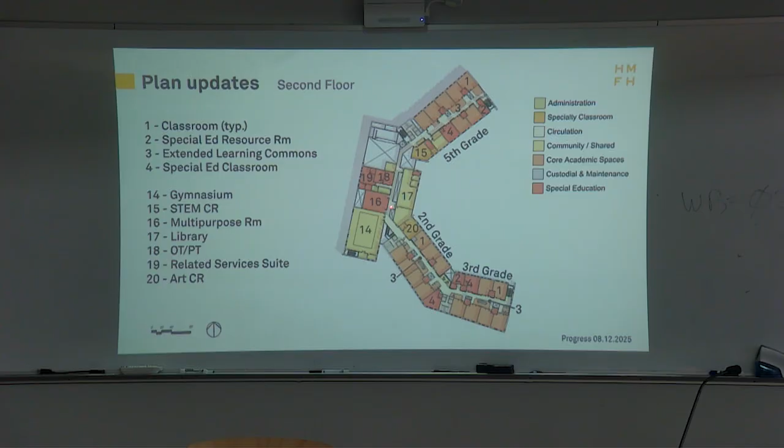The same is true on the second floor. We've got the multi-purpose room now right next to the gym, so there's some good overlap there, maybe a possible opening of the wall if that was a benefit to the two programs. Again, the extended learning commons are getting laid out in more detail. There's some additional program here, and the opening into the lower cap and upper cap are being laid out.

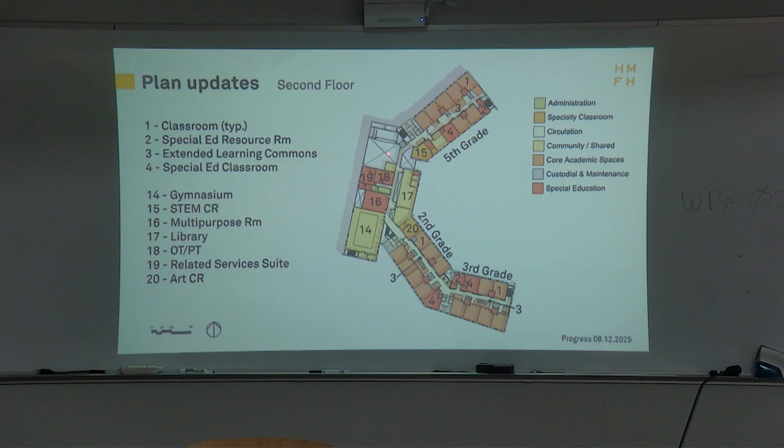And then on the top floor, I think this is very similar, just again more refinement in the learning commons, and more or less the same layout.

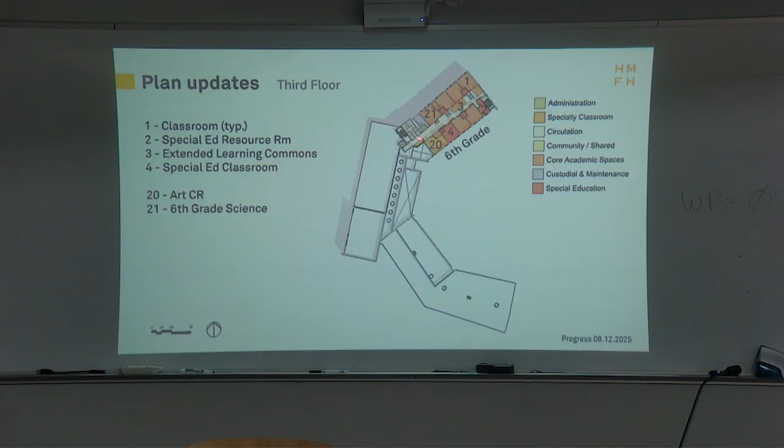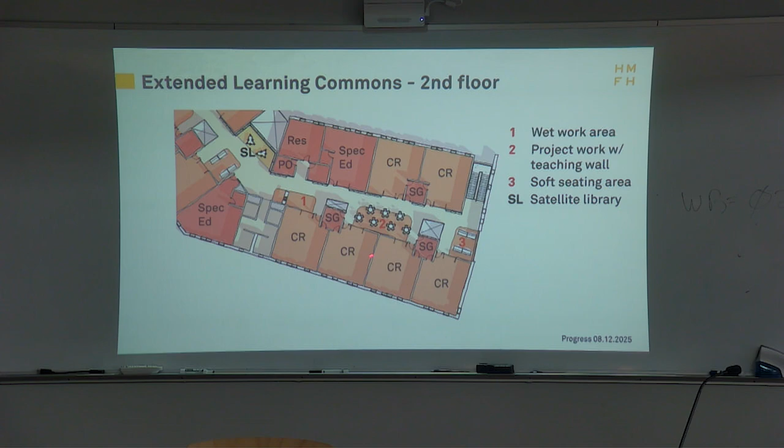Obviously this wall will get thicker and it'll work, we're pretty early. That will allow them to open this up and really make this classroom space part of their space, and allow supervision of this zone more easily.

Are we worried about sound for that, like zone 2 there? Because if there's a pocket door with glass, kids are gonna go like this. What are they doing? All right, what are they doing out there?

Well, I think the idea is if you're using this, potentially it would be open. So like all one thing? Maybe. And then what about the kids across the hall? Even if it's not, I do believe we can get something that's acoustically rated, equivalent to the wall next to it for sound dampening, or something better, and could provide the acoustics that we would need.

Obviously there's requirements for the corridor versus the classroom, so any glazing unit or door we would have has to meet that. So we would have to design to that.

I'm assuming a large amount of glass is for aesthetic purposes, but two questions. One, I'm assuming that's gonna be a lot more maintenance for cleaning, so is there an additional cost for long-term O&M? And two, there was a concern raised earlier about the staircases having so much glass, there was a concern about safety, especially active shooter situations. So are we moving glass from one area to another, and wouldn't that concern carry over?

We would be treating those with shades or some way of closing them. They'd have a lockdown system so they could be secured in an emergency, and there'd also be some sort of shade or blinds that would come down and conceal it. So for the purposes of an active shooter situation, it would be solid visually. We could have an opaque shade or something like that come down.

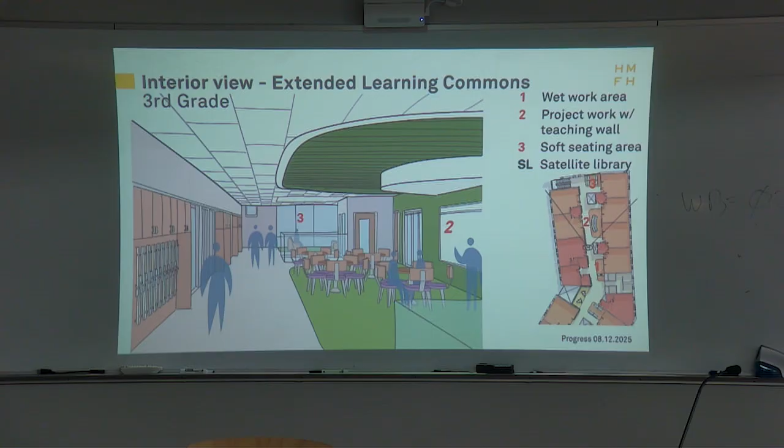So this is that view of that space, and then there are some other additional interior views that we drew, I don't know, for lack of a better word. So this is sort of that satellite library zone between the 2 grades on the 2nd floor in the lower school. So you can see, again, the idea that there could be a color here that ties, to let you know that that zone's like a pull-off zone, and there could be bookshelves, some are higher on the wall, some could be lower, and then the view down below to the satellite library below could be through this glass wall.

And this is sort of looking back to the main spine where the gym and all of those other shared spaces are on this floor. And, you know, the soft seating here in front of you, the gathering zone, and then way beyond the wet zone, which you cannot see in this.

Can you explain just how that glass box is supposed to work again? Which glass box? The one that 3 is on, I know that's not what 3 is. At the moment, this was the idea of like a glass railing. It's a light well, so because it's a 2-story connection, it does not need to be full height. It can be, and we could do it, but it's really the idea that you'd be able to have a visual connection between the 2 floors, and also a way to bring the skylight, daylight that's coming in up here down to the floor below. So we want to, if we're putting in skylights, you don't want to only benefit one floor.

You want to try to get that light penetrated as deep into the building as you can. So this, at the moment, was shown as a railing height. It can be up to the ceiling height. It could have some solid at the bottom or not. We're being very like, railings are glass, and I was just doing that everywhere. Obviously, that's also very expensive, so we're not going to do that.

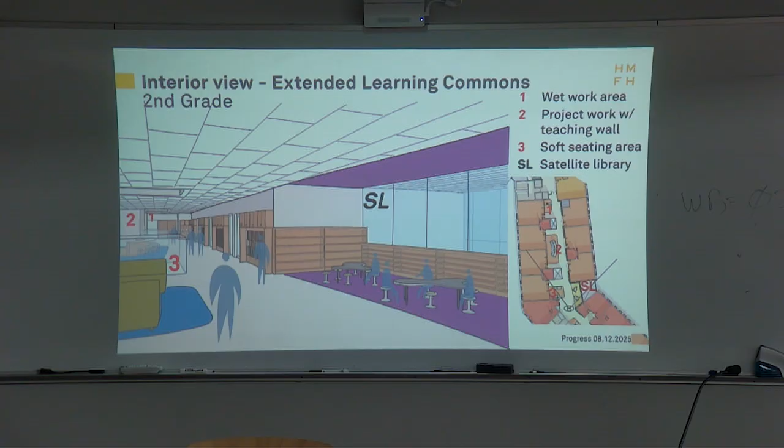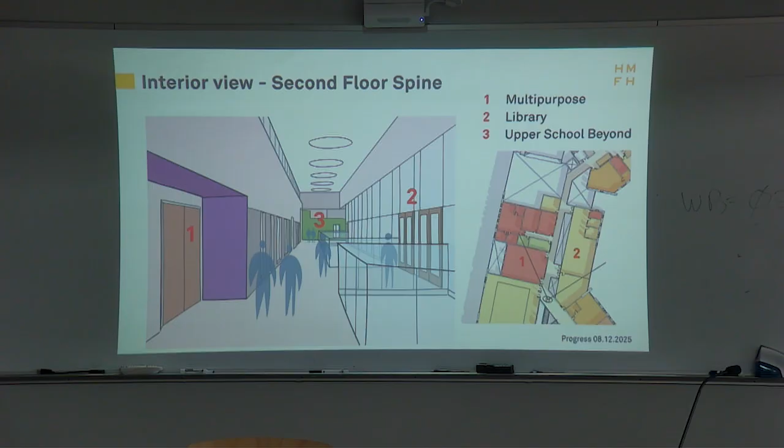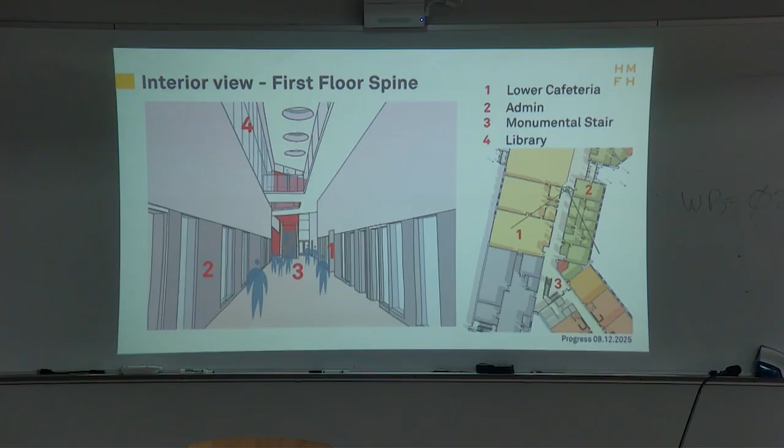And I think that's all of our interior views, but then I did have a little more on interiors, just talking about materiality and what we're planning to put into our cost estimating set as a baseline, and then we can obviously, if we're over budget, readdress and think about different materials.

The thought right now is that we would consider an epoxy terrazzo for the main spine and the two cafeterias, and then kind of extend it where it naturally ends. There's security doors here and here for the wings, so that would be a natural stopping point. And then similarly, we would do that through the bridge zone on the second floor, and the stair that connects the two floors could also have epoxy risers put in it.

Is that just for longevity of the product? Yeah, terrazzo is like, if you've been in old buildings, terrazzo lasts forever. But actual old terrazzo with concrete and everything is way too complicated, so now they do the epoxy version.

It lasts a very long time, it'll be there forever, and it'll look beautiful. It also gives you a lot of design opportunity - we could put the seal of the town in, we could put paw prints or wildcat stuff around. So it gives a lot of design creativity and flexibility, but it's also going to last forever and be easy to clean.

Those are the cafeterias and the main hallways in and out - heavy trafficked areas, so having something easy to maintain is important. The rest of the wings mostly, we're thinking linoleum, because epoxy is wonderful but it's got a premium cost, so you can't put it everywhere.

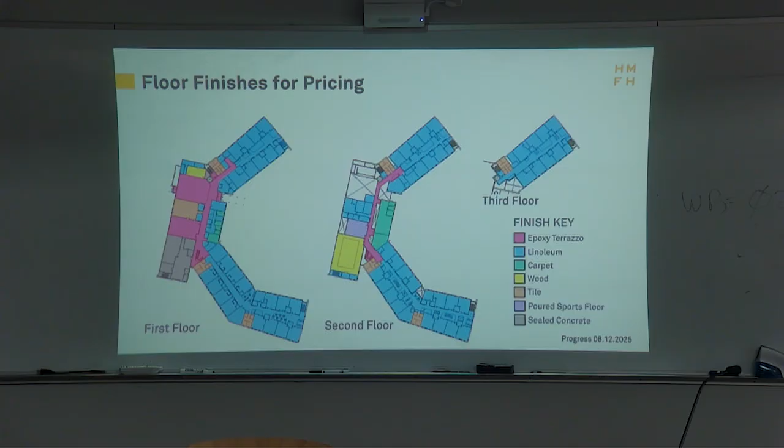So what is poured sports floor? It's an epoxy product, poured over concrete, and it's quite a bit thicker than typical epoxy, so it's got a lot of sponginess to it. Then it's overlaid with a very sturdy top coat that is a color typically.

I think you can sometimes get like a wood look if you want. You're not talking about the rubber stuff, the recycled tire stuff? No, not that - that's like in weight rooms.

This is like, if it's blue, it looks blue - it'll almost look like these floors, that bright color sometimes, and it's very solid. It's got maybe slight dimpling to it, but it's pretty much very flat and even. You can paint sports lines on it very easily. Similar to a wood floor in that aspect, but very one color. It's got a lot of squishiness - in a multi-purpose room you don't usually need the wood floor, so it's a little bit of savings and still very durable and long lasting.

So that's that, and then for walls and ceilings - for walls, we're planning on doing tile wainscoting, because that's a very long-lasting, durable solution. Drywall gets scuffed up and you're painting it all the time, we don't want to create that situation. So we're looking at putting tile at least up to a certain height.

On certain walls, more so ones out of reach, we'd put vinyl graphics - like that stair at the end of the hallway where I had red, maybe that would be a beautiful graphic with wildcats and paw prints. We'll find what inspires the school and what is meaningful to the town, and do that. This was a very naturey theme - you can see part of a leaf on this floor and ripples of water, so this was leaves and sunlight and whatever.

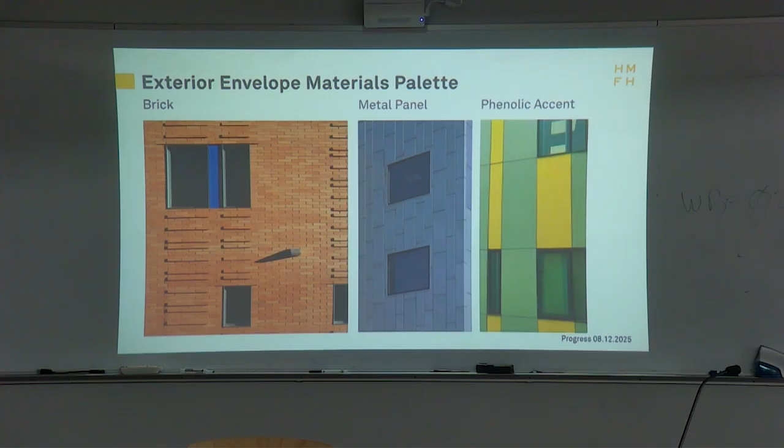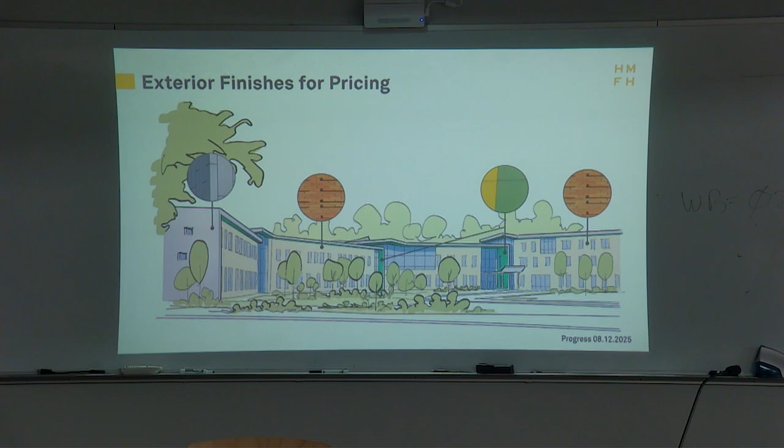And then the underside of all of these metals is maybe where, or ideally, to me, where the accent opportunity is, and sort of these folded elements kind of reading and folding across and over, and that bringing in a moment of potentially color. It could also be like a wood look material, so it could be a natural material look of wood, but it's not wood, and it doesn't weather like wood, but it has that look. So that is the materials I have.

We have some axons too that we've been looking at. You've seen this one more or less. This is an updated version, and you can sort of see how the materials are laying out from view. Also a bit of a sneak peek on the site, but I think they saw this one at the last meeting, so maybe you saw it in what was distributed, but this is the first time we've presented it.

So there have been some updates where the canopy, we've kind of looked at how this parking area can be rearranged and allow much more play out front, and then so the canopy has been sort of readdressed to relate to that. And you can see these folds as they're coming around and how they create these opportunities for additional clerestory light to bring daylight in. When you're coming down this hallway, you'll see glass above you, in front of you, up high, which I think will be a really nice experience.

And then we did do the back of the building too, because we wanted to think about how all these materials are transitioning around. So predominantly in the back, we're thinking mostly brick would be coming around, but that the gym itself could be yet another folded element so that that motif or idea is happening somewhere on the back so that it doesn't look like we forgot about the back or something, because it's still going to be potentially a major point of entry with this set of doors there. So we want to make sure it looks lovely as well.

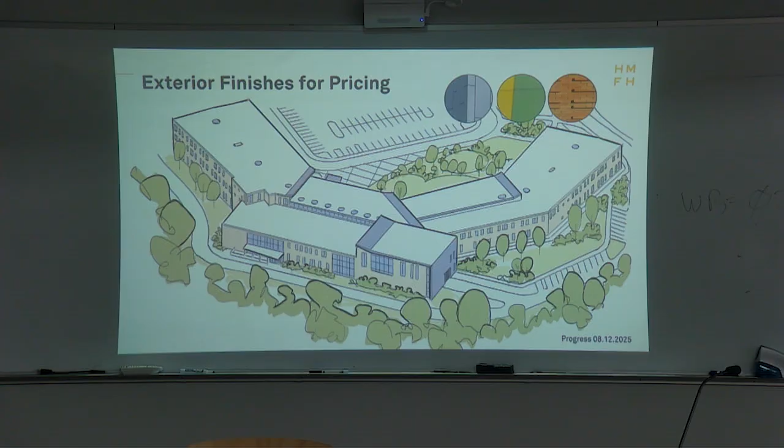So that's kind of it, and you can see the metal again rising up over and across, and that sort of happening, and then the rest being pretty simple and brick on the two educational wings. It's worth mentioning that masonry brick is highly economical and very robust. Lasts a long time as long as it's maintained well.

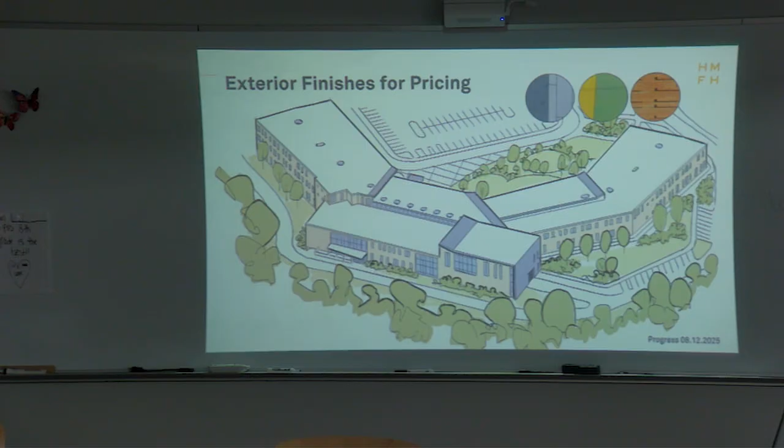Same with the metal. Standing seam or flat seam, either way, it'll be good. And the phenolic we've used on a number of projects, whether it be color or a wood look, is warranted to last for a really, really long time.

And even if it's red, it doesn't fade. They won't give you a color that will look bad in 3 or 4 years. They don't want to do that.

Wouldn't the colors be similar to this school, where it's the sandstone with the maroon accents on the outside? It could be. We were looking at green just because of nature as the theme, and because sometimes we don't necessarily get into school colors at the elementary level as much.

I do think the Wildcat thing is fun and interesting, but wouldn't this put like a green paw print when everything else is maroon? That's all I'm saying - to have one cohesive school unit. Yeah, it could be more maroon. I was like green, just to pick something.

The concept here is this school with woods, and there is reason to think about colors beyond the maroon. So that's a conversation that we'll continue to explore. Right now, we're owning materials more than color.

Sure, because it comes down to what gets costed in the cost estimate. Yeah, I like the idea of the wood, the wood style, and then there are some beautiful wood looks that they make, which would be very natural. And then there could be color - maybe window frames could have pops of color, or what have you.

On the interior, we're gonna need more than just one accent color to define zones and create spaces. And if we were using maroon as the school color, we'd tie all the other colors in with that, so they would look really nice together. There probably might be green and blue and maroon.

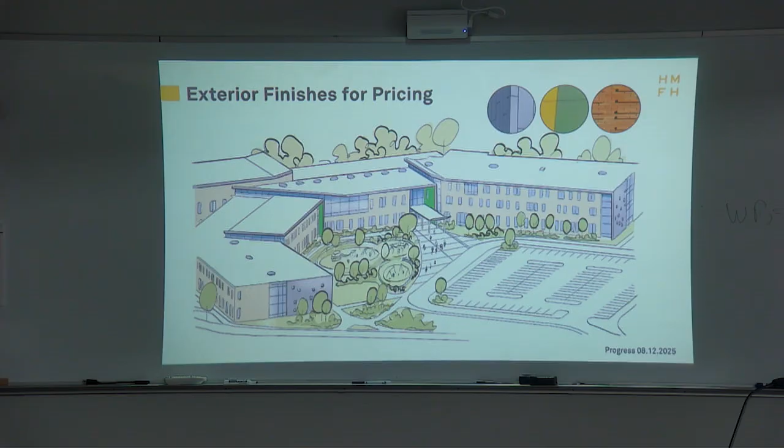So I think we should see what the cost estimate tells us. Flat seam is, I think, one of the more effective metals — pretty cheap comparatively. There's other panelized metals that are more money, so this is the most cost-effective metal system. And the phenolic is, I think, in keeping with that pricing-ish.

So, want to do the site? Okay, so...

We've been talking about the site all along, and we've talked a lot about the parent drop-off and the bus drop-off, but also we have been talking about the wetlands and the way that they are pulling in on us and creating a smaller and smaller usable site footprint. We also know that we have to have the road around the back of the school for emergency access and for delivery access, and so we had previously been talking about that as an additional parent drop-off location.

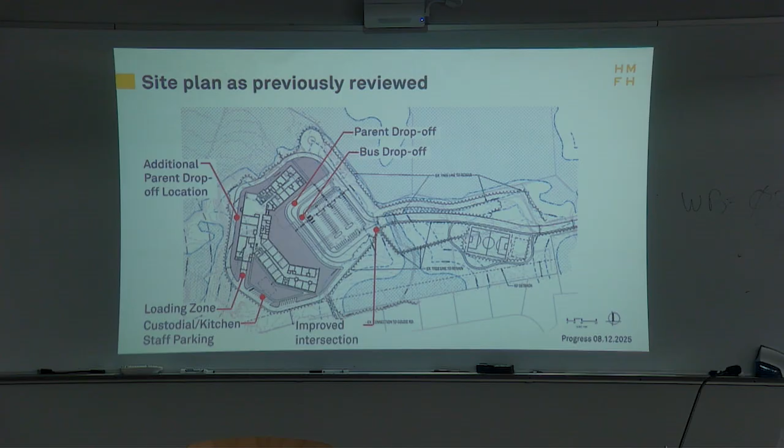In working with the district and providing a few options, we've continued to develop the site plan. The way that we are proceeding right now shows the bus drop-off at the front, only that one loop at the front, and the parent drop-off will continue around to the west side of the building to the entrance into the cafeteria. So all of the parent drop-off will go around that way.

This does a couple of things. One, it frees up more space out front, in front of the building, for play and active space, plaza, and entry. It also creates a longer parent queue, so that you can have more lineup before it starts to impact Stepping Stone Drive.

So it's really primarily about that expanded play area as the site becomes tight. The other thing you may notice here is that the wetland lines have changed. We have flagged and surveyed the existing wetlands, and those are represented here. The good news is that they really have almost no impact — actually, no impact at all — on the building footprint. In almost all locations, they've moved slightly away from the building.

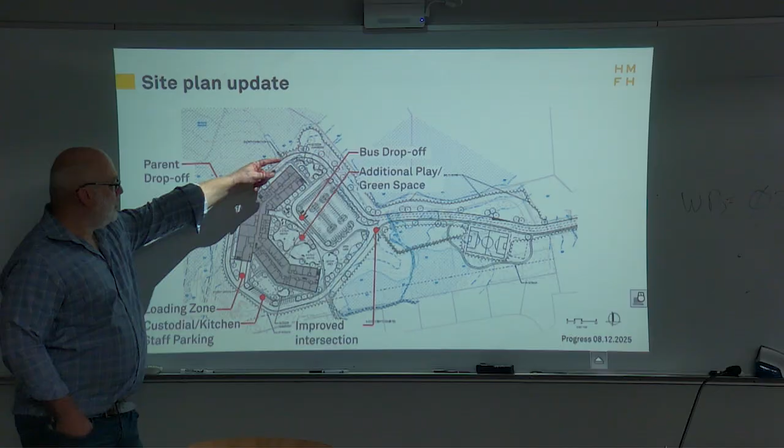Parents are going to line up far ahead of that. They're going to go straight past that door, all the way to where your septic is. Maybe at first they'll start lining up there, that's their problem. No, because the first one's gonna stop right at that door and not keep going. Keith is gonna be out with the big signs that first day saying don't stop, we got it. Or the second day, they'll pull those big signs out there that say stop.

For example, here, when we designed it to have the pickup in the back, which was changed and which we're going back to, we did set up a system where cars would stop to allow buses to exit first. I think we set up a cone, and it just became the normal part of practice for them to stop there. There's definitely some education that has to happen, but once they get a routine established, they should do that. Then they'll pull up, and the kids will walk out depending on the age group.

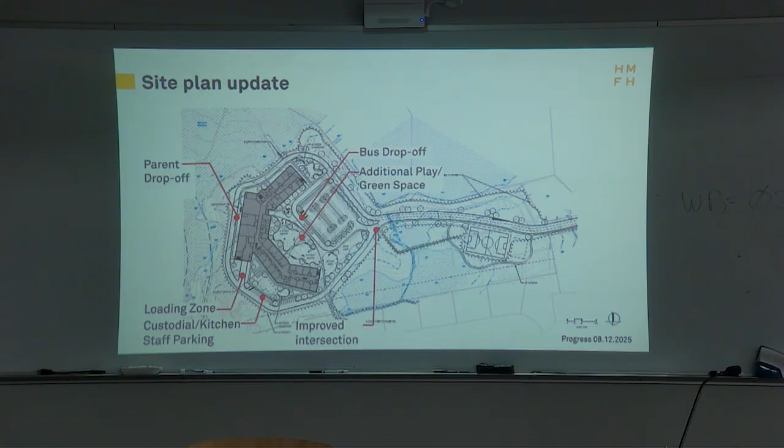Does the MSBA fund any of the field, or is it 100% on us? There's a site cap, so it depends how you look at it, but overall the MSBA will fund a percentage of site work. If you want to put the field within that allowance, you can, or put the foundations, but generally speaking they don't exclude fields, they cap site work at 8%. We'll have so much site work that we're gonna blow past that. I don't think it's ever been under on any project. Every project does - they're always over.

Does the potential of using geothermal change anything with the site and the field if we were to use that area as well? I know we can put fields over it, but are there any additional incentives if that were there? So, if we were to do geothermal and that was the area we're putting the wells, we have to develop that area - is it still the same scenario, you're using this amount of money regardless, it doesn't matter, or are there better options?

So if geothermal's going in, it doesn't increase the site cap, if that's what you're asking. Yeah. Thank you.

About a month ago, we met with the chiefs and the principals, along with Mark, Gary, and our electrical and security engineers, for a security meeting. We covered fire alarm and mass notification systems—mass notification being the communication system for the entire school in emergency situations. We also discussed access controls, door controls, CCTV security cameras, and intrusion alarm systems. These were the main categories for the meeting, and we distributed meeting minutes to the committee. Does anyone have questions on those minutes?